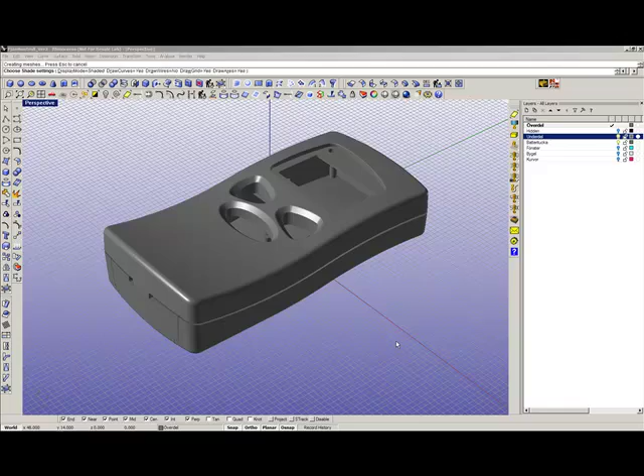Let's take a look at madCAM and how it handles two-sided machining. Here we have a remote control, and we are going to cut a plastic shell from the top of this remote control.

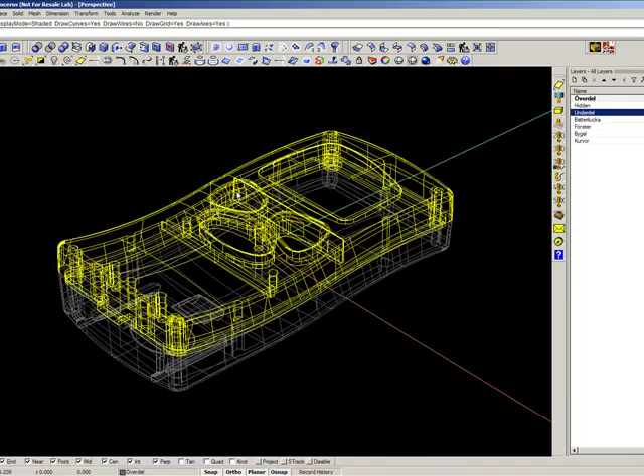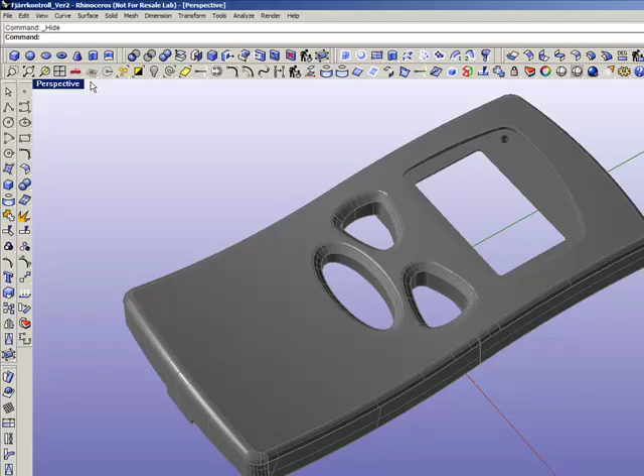So we can take a look at the top plastic shell, and we are going to cut it from the inside and the outside. We have prepared a model for this, and what we see here is the shell of the plastic part, and we have a stock, and we have a cap surface.

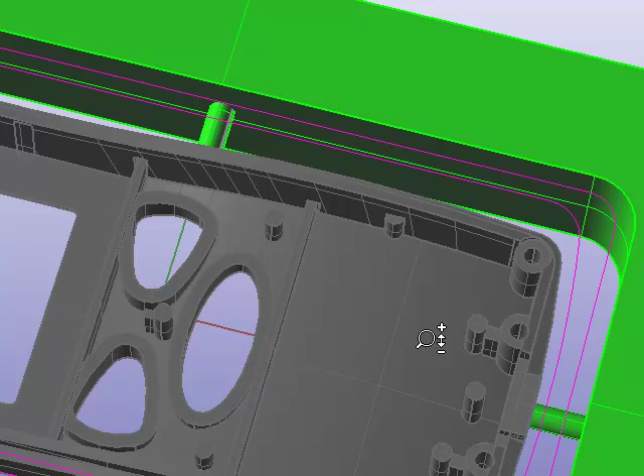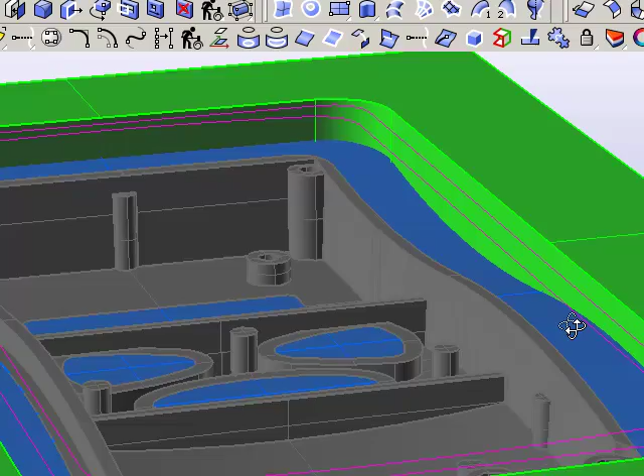The stock is the material, the workpiece we have, and we have also created some tabs that will keep the plastic shell in place when we cut it from two sides. We also have the cap surface that will prevent the toolpath going below, so we can make it only cut the inside of the plastic shell.

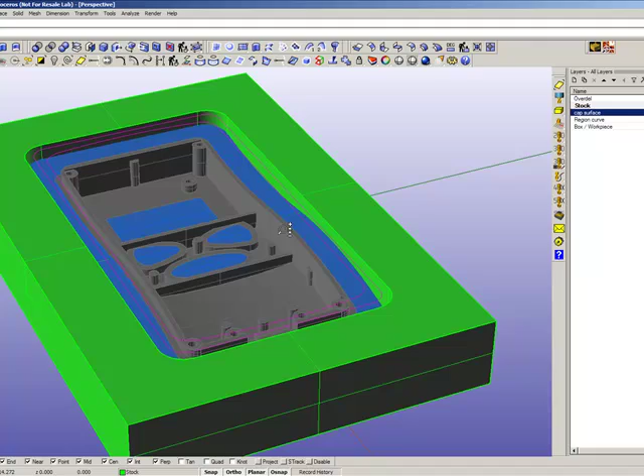So the first thing to do is to select the model, including the stock model and the cap surface. Then we pick a flat end 3mm cutter, 0.3mm stock to leave, and then we calculate the roughing toolpath.

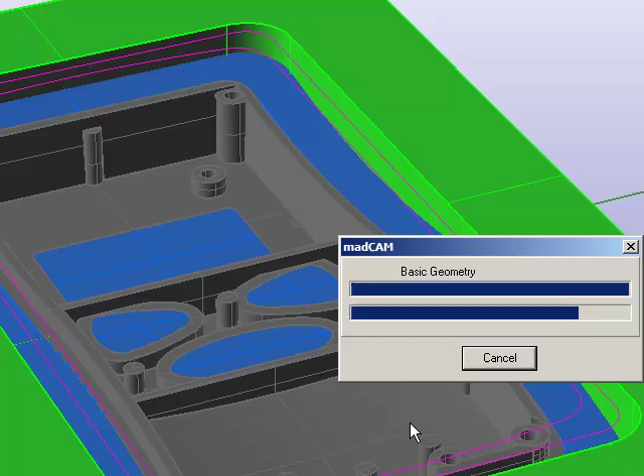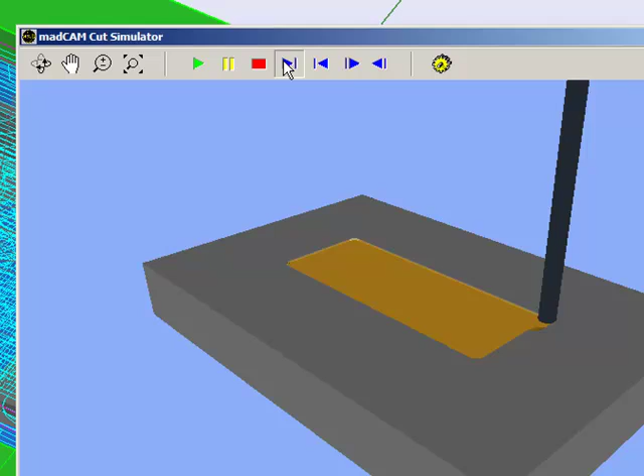And there we have the roughing toolpath. We can simulate this, we can run the simulator, and there we can see how it looks after the roughing toolpath.

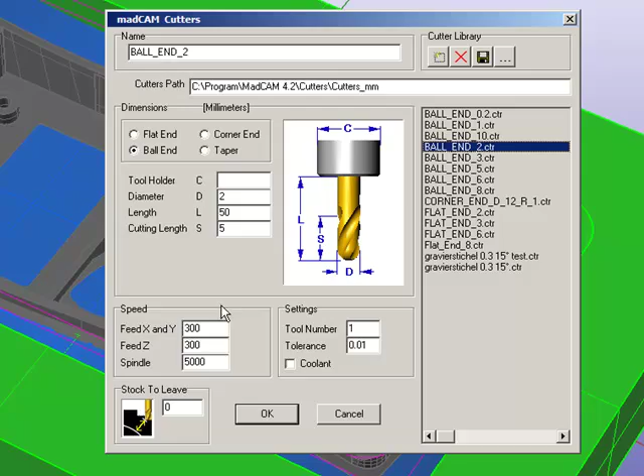Then we can hide the roughing toolpath, pick another cutter for the finishing. Just for this demo we can pick a ball end 2mm cutter, no stock to leave. We pick a region curve, pick that one, and then we create a Z-level finishing toolpath.

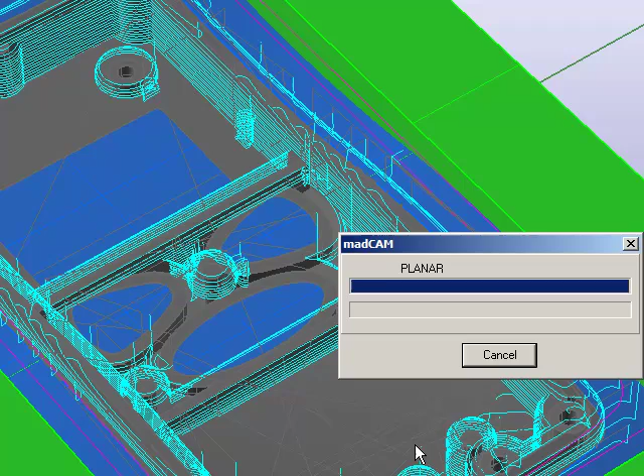And we can create a planar finishing toolpath. And a pencil tracing toolpath.

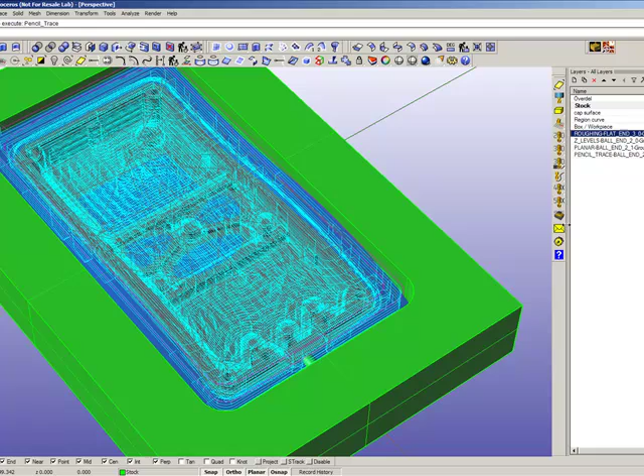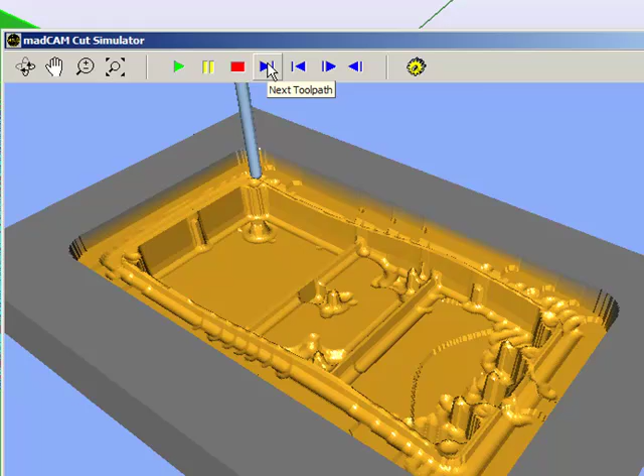And then we can run all of them together in the simulator. See the roughing, see the finishing, and there we have the inside of the plastic shell.

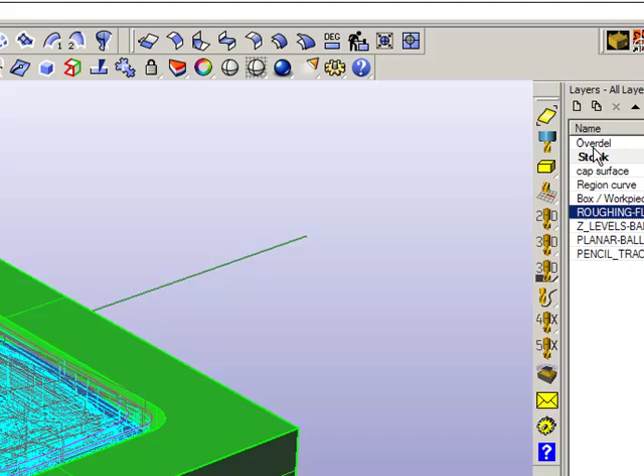Okay, now we are going to cut the other side, so we can create a new layer. We can call it inside, and we can move all the toolpaths to this layer, and now we can hide them and show them, and we know this is the inside.

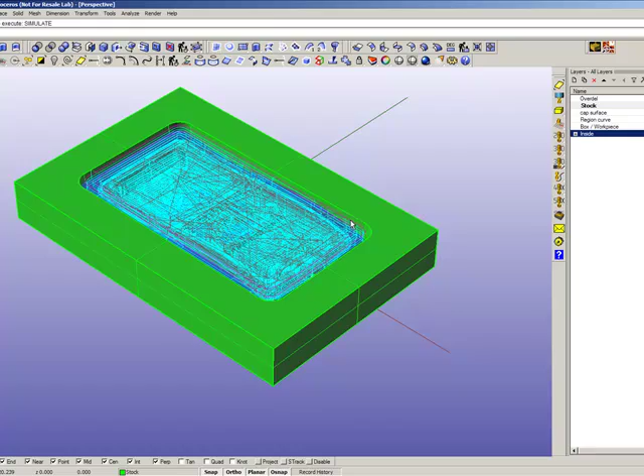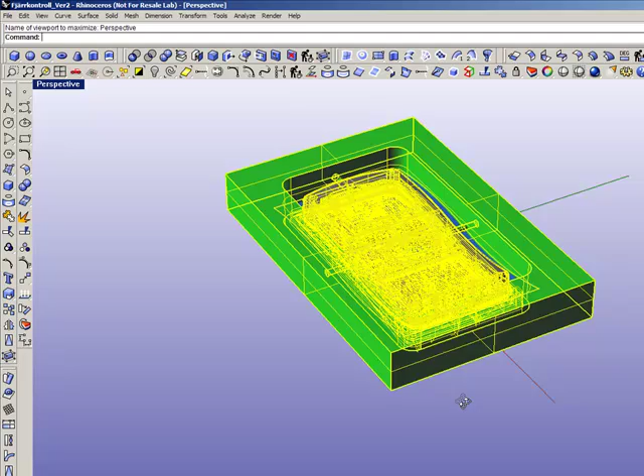So now it's just to rotate everything in Rhino. So we rotate it 180 degrees so we can cut the outside of the shell.

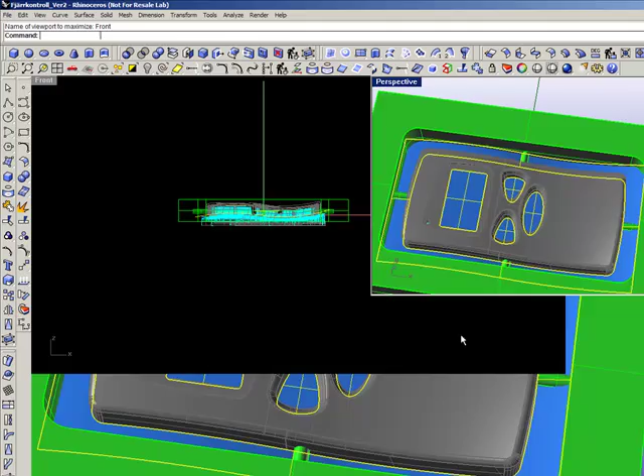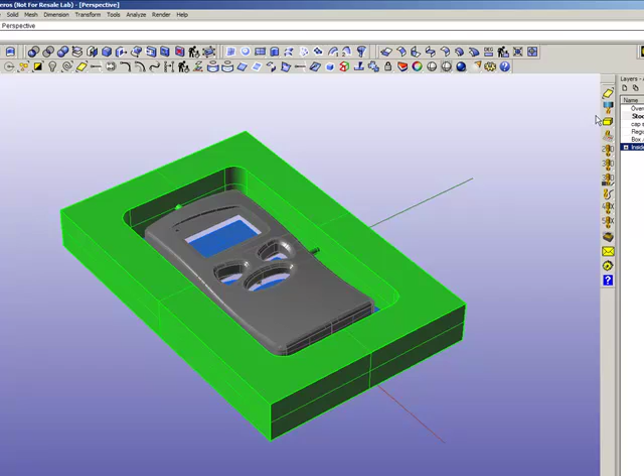And now we can lower all these cap surfaces so the toolpath will cut through what we did cut from the other side. And we can hide the toolpath from the other side, and then it's just to select everything for madCAM, and we create another roughing toolpath.

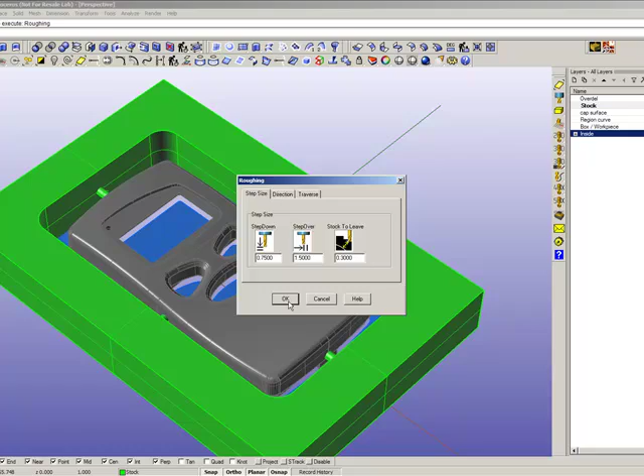We can pick the 3mm cutter, 0.3mm stock to leave, and calculate the roughing toolpath. There we have the roughing, and we create the finishing.

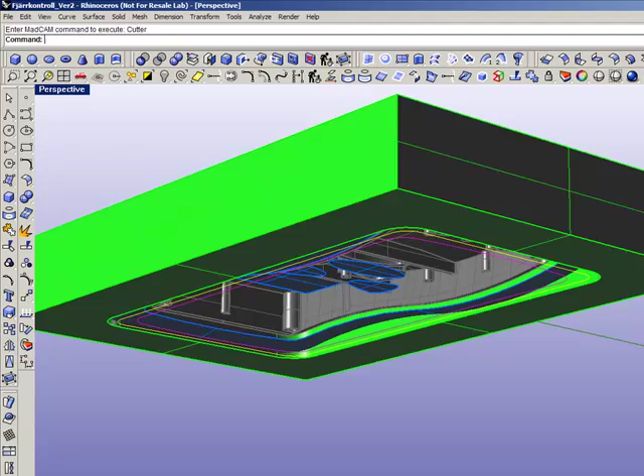Pick a 2mm ball end. We can use a region curve. We can move it up a bit so we can see it. And then we pick region, and we create a Z-level finishing toolpath.

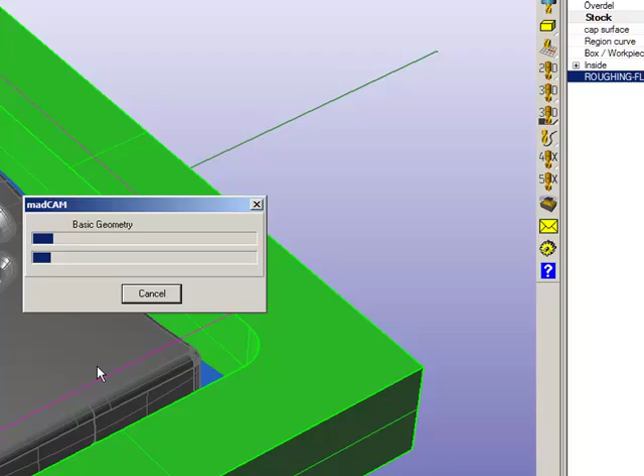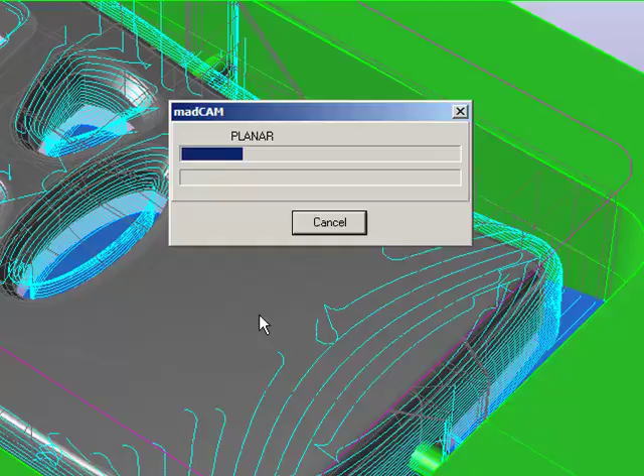And there we have the Z-level finishing toolpath, and we can follow up with a planar finishing, and we can also create the pencil tracing.

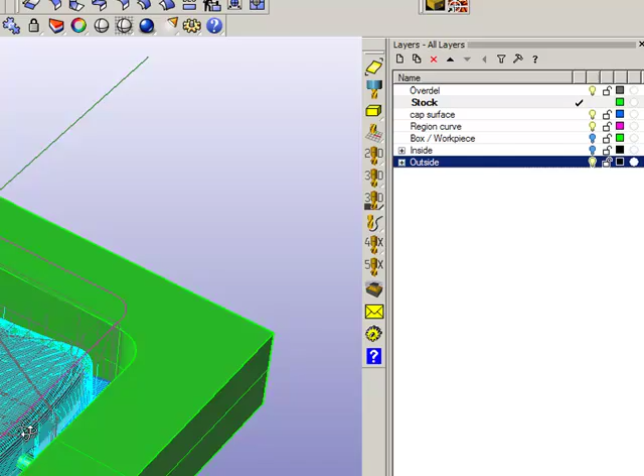And we can create a new layer that we call outside, and we can move toolpaths to that layer. And now we can view the outside toolpaths, and there we have the inside toolpaths.

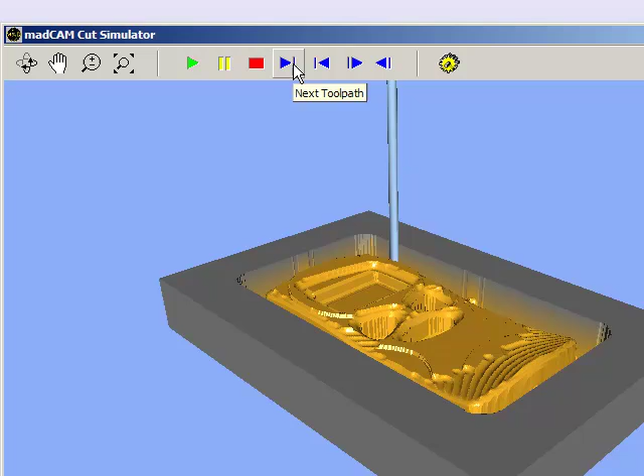And we can simulate this: roughing, Z-level finishing, planar finishing, and the pencil trace. And there we have the plastic shell cut from the outside.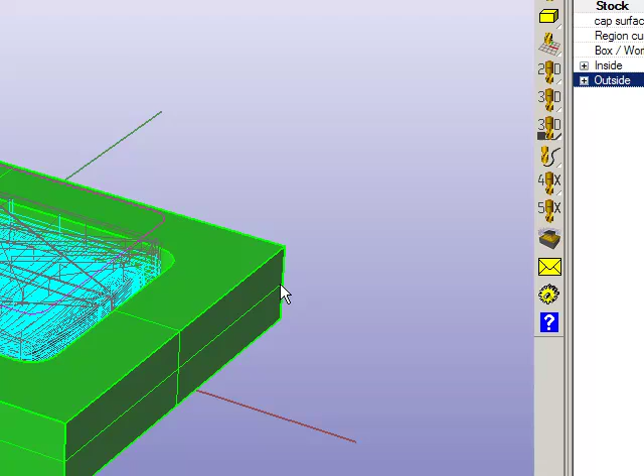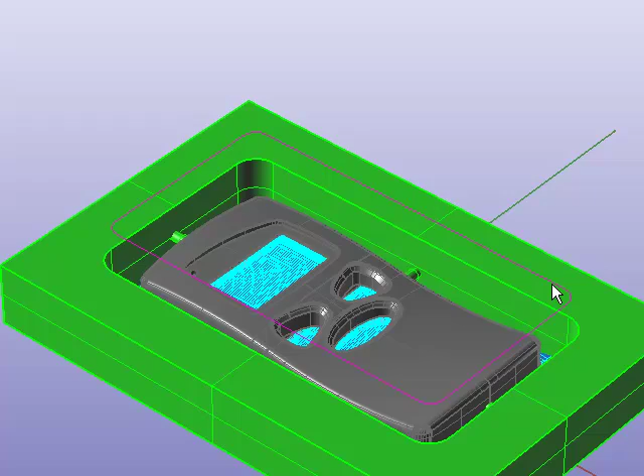So now it's just to place this in the machine and post-process. First we post-process the toolpaths from the inside, and then we post-process the toolpaths from the outside. Or if we have a 4-axis machine, we can post-process everything in one setup, and it will rotate automatically.